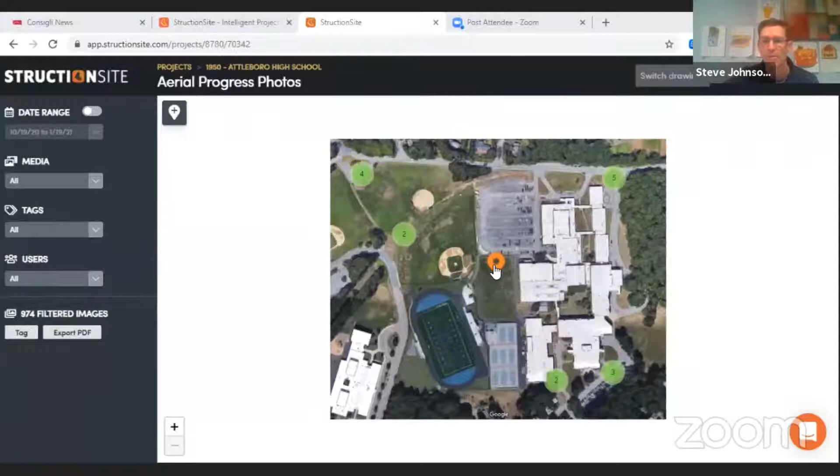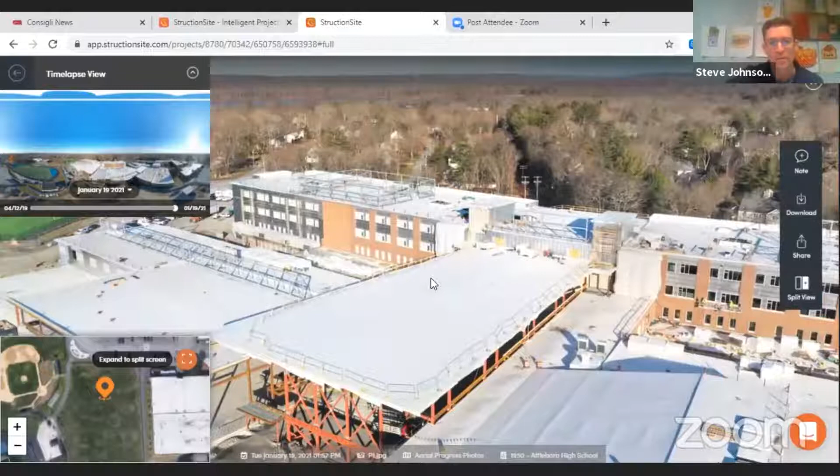We have some good progress in the field. We have almost all of the roof on. There are two sections of roof that we're buttoning up: this low roof on one side of the building, and its partner on the right-hand side. Other than that, all the main fields of the roof are on. In the next couple of weeks, we're going to have these two sections done, which is a big milestone for the amount of roofing installed.

The roofer will need to stay on site. There's a lot of metal trim and other work that needs to be done around the edges, but the field being done and this far along helps us get that much more weather tight on the interior of the building.

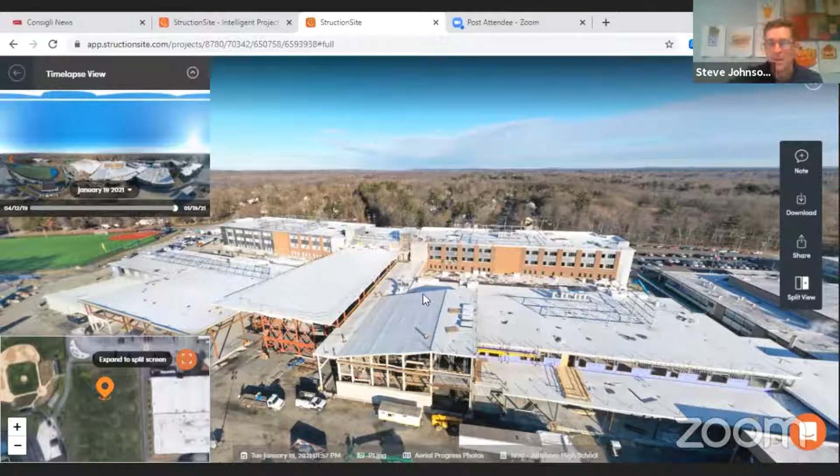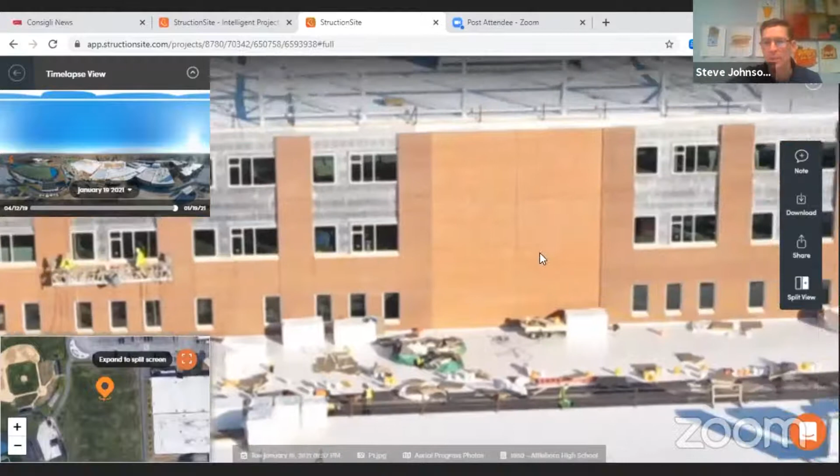You'll also notice we've got, if we zoom in here, some storefront windows in on this side where a lot of the brick is also completed. All along here we've got storefront windows, and then the masonry continues.

We're on this section, we're getting... hold on, there's some feedback, somebody's got to mute. Jim, can you mute people? Sounds like a TV that's on.

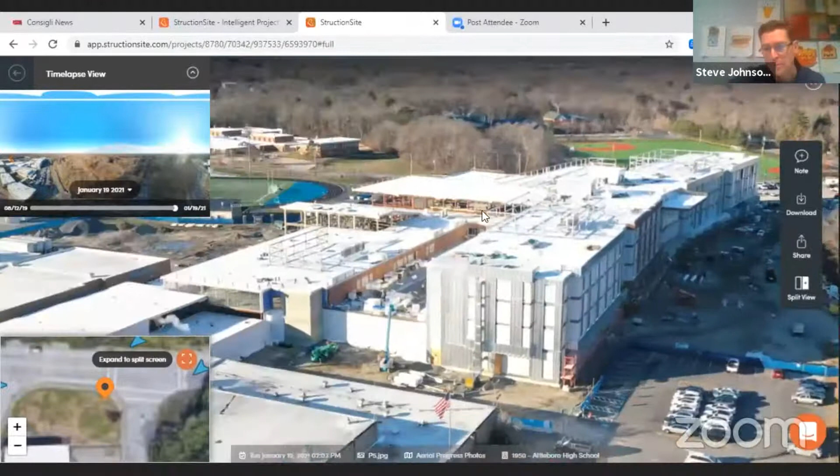So the mason continues to work over on this side. I'll switch the view — it might be more helpful if we see it from here, get around a little bit so you can see that more of the masonry, more of the bricks, has been installed on this elevation here, kind of hidden from view.

We've got masonry starting on the front elevation of the building. That's scaffolding that the mason is using, so this face will start to take shape over the next couple of months.

Other than that, on the outside it's kind of business as usual where there's not a permanent window — there's a temporary window allowing us to temporarily heat the building. This is our temporary heat on the east side of the building here.

And we have poured almost all of the interior slabs on grade, which again is another pretty big milestone for us. The last section I'll pull up here.

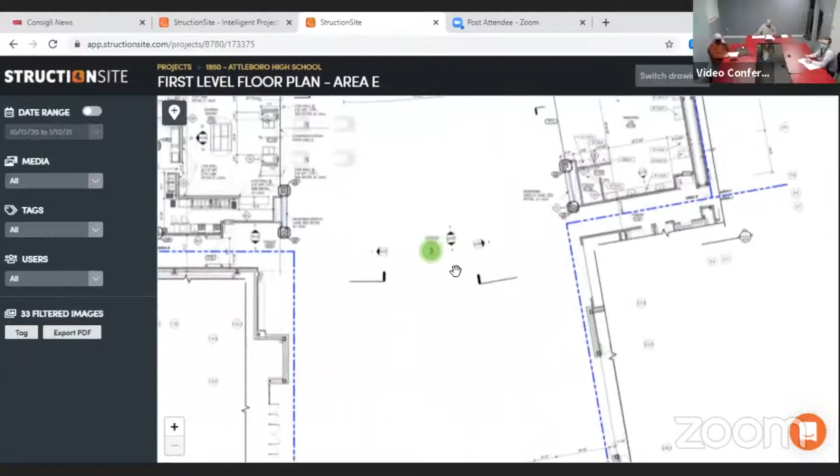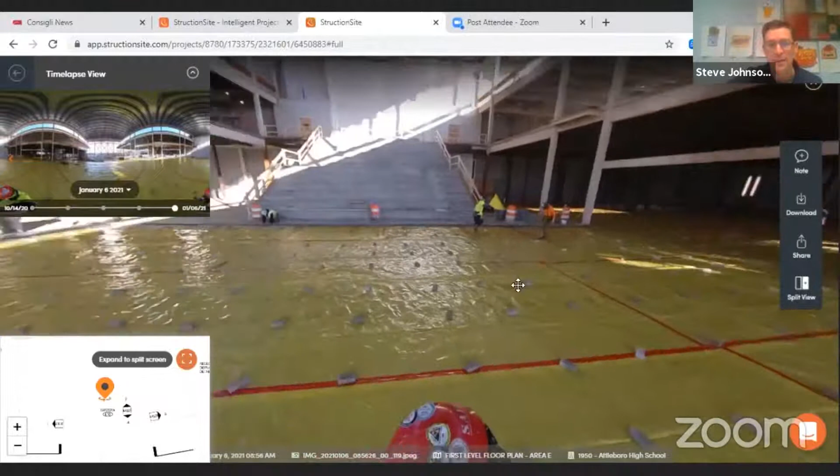So what you see in this picture, once it pops up, everything that's yellow here that has this barrier down will be poured this week. This was the last section of slab on grade concrete that we were going to pour at this part of the project. We've left some area open here just to allow access into the auditorium.

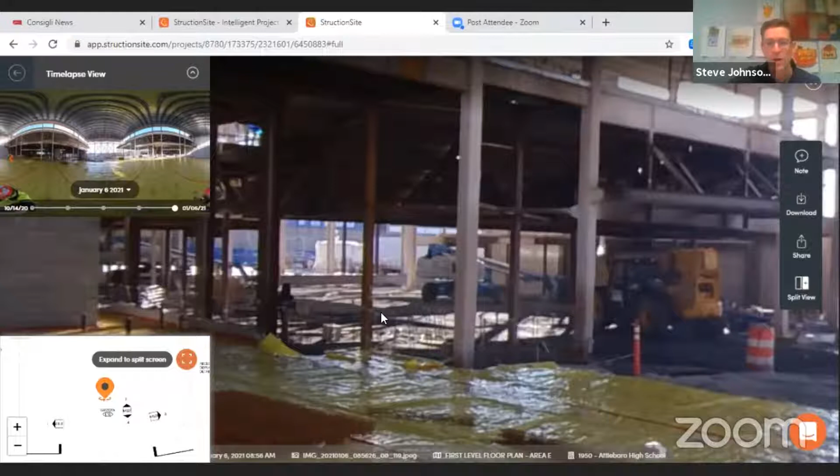The auditorium is the other slab on grade that we did not pour, and that was intentional. Eventually, the permanent feature in the auditorium is a sloped section of concrete, and we're keeping it level right now because it's allowing us to do all kinds of other work in here.

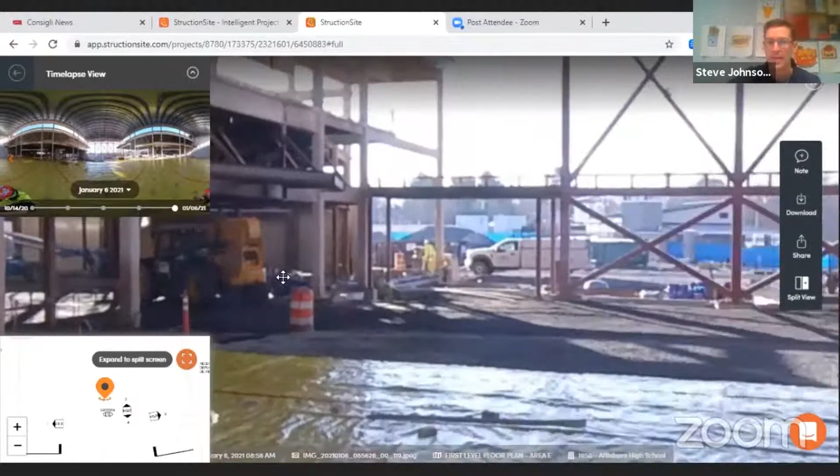That'll be one of the last things we do: dig that out, slope it, and pour that concrete. Leaving this concrete section out here allows us easy access with vehicles, so we don't trash and ruin a good concrete slab. So it'll allow us to get to the gym on that side and then over here into the auditorium.

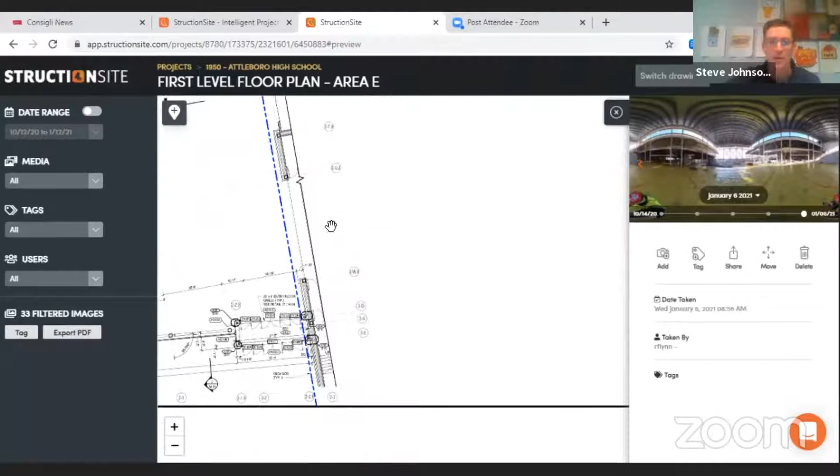Within the auditorium itself, the catwalks have been 100% installed, which is a good chunk of work to have done in place. Up on the 4th floor...

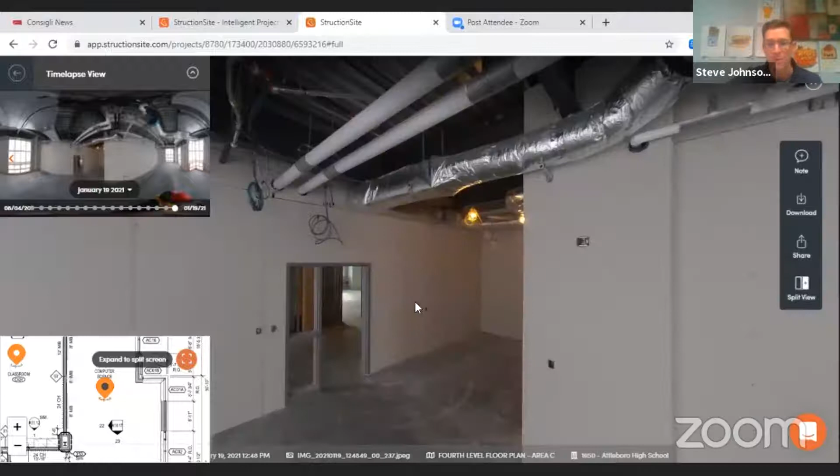Exciting to us construction nerds is that we have drywall actually installed in a room, in several rooms actually. So it's actually starting to take shape - no longer frames to walk through and walk around. A lot of drywall being done, which is great.

Our favorite noise to hear at a job site is screw guns, so a lot of that work is taking place now on the 4th floor. And then this is still more the 4th floor.

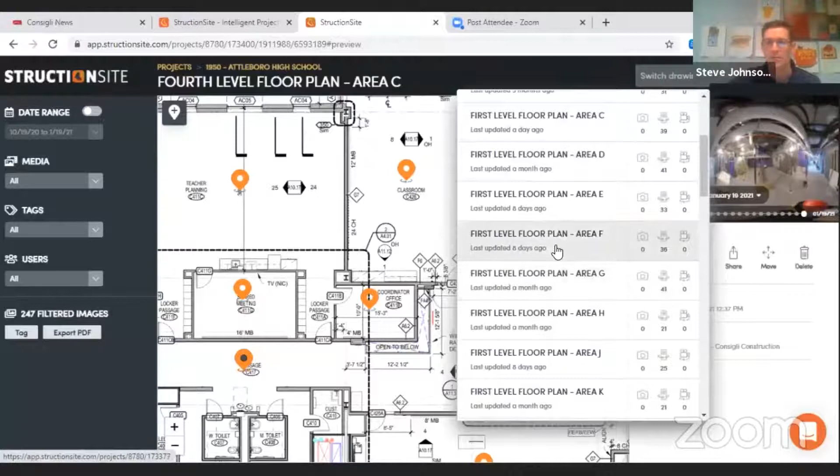So a lot of drywall in place, and then we've actually worked down to the 1st level and have a lot of framing done on the 1st level. And a lot of the MEPs have made their way all the way down to the 1st level as well, so good progress down there.

Show you that in a second. So good progress all around. Things are moving forward, lots of framing.

This is the 1st floor, C building here, already with a lot of the framing, a lot of the duct work above installed and already starting to be insulated. A lot of the plumbing and sprinkler pipe as well. So we're humming along - we are on schedule.

The next couple of months, you'll see a lot of masonry working its way around the building, followed by permanent windows, whether it's a storefront or curtain wall. That'll be the bulk of the activity.

Then within the building, we're just working our way from the 4th floor down. We'll also start to see some activity in the main mechanical rooms, which again is boring for everyone except for the mechanical people. But it actually is good progress, and it's a lot of work for us to get going on. It's just not the most exciting stuff to show in a picture, and it doesn't change much from day to day, but that's good progress for us.

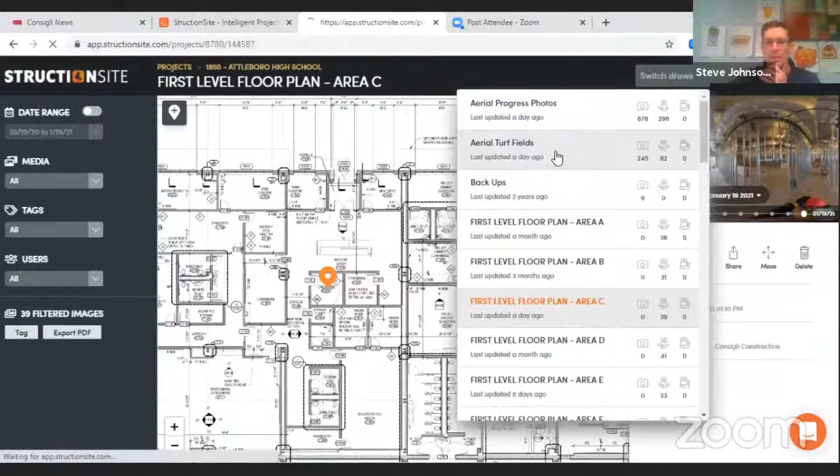Other than that, I believe last meeting, on the 6th, we voted on the substantial completion of the turf field, so not much has changed there. We are picking away at the punch list items, trying to reduce those down to zero, and we'll get KBA out there to inspect it once we reach that point.

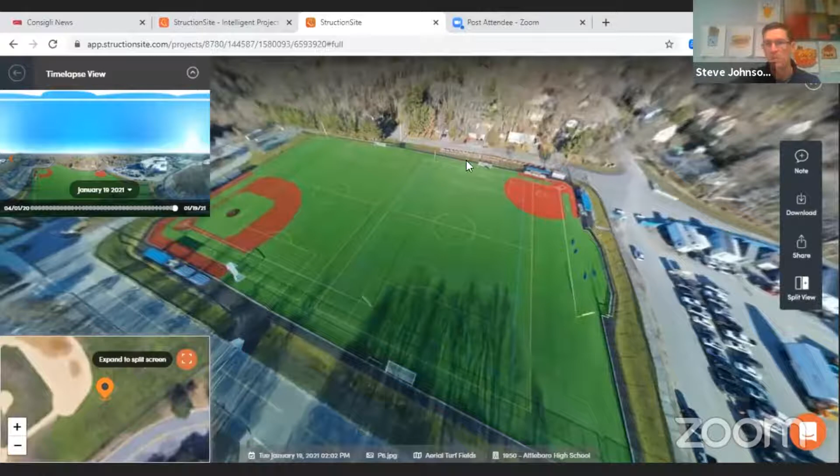But again, you won't see much activity here at all, you won't see a lot of change, except our temporary fence has been taken down. So what you see here is all permanent fence, and there are locks on all the gates, so it is secure and ready to go.

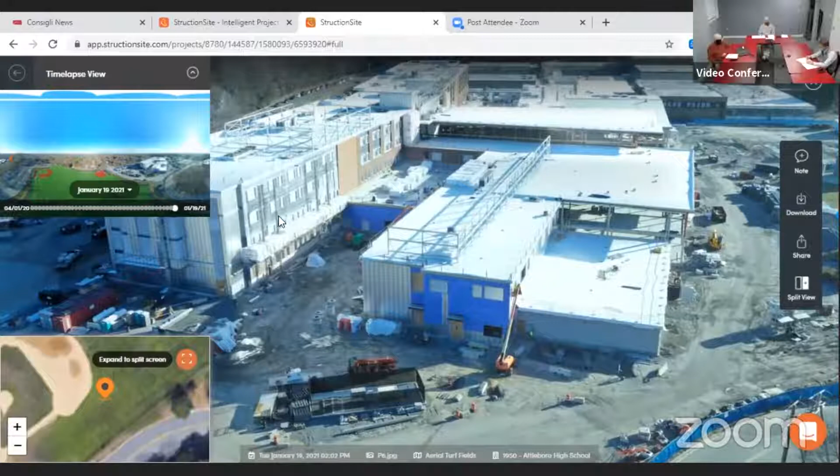So Steve, when will the building be fully enclosed? Like with permanent windows and glass, Jack? Well, how about with temporary and then permanent? So temporary, the ABC building is already there. These other buildings, it'll be some time, and quite honestly, we probably won't temporarily enclose some of these sections because the cost to temporarily enclose it doesn't make it feasible, doesn't make it worth it, since we're not going to be able to throw crews out there to put any additional work in place.

So it'll be a few months before permanent work is started back here in the south section and then have it fully enclosed. But we do have enough work in all areas of the building to keep us going very steady right through the winter.

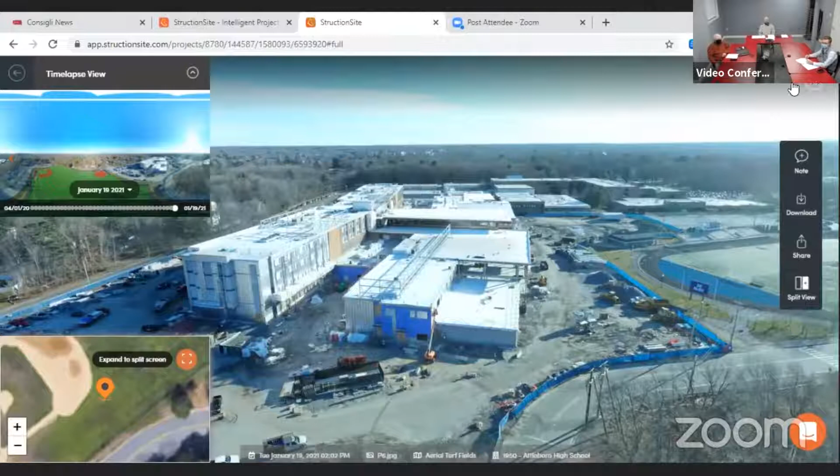I just want to update the committee that the plan to discontinue a portion of the street, the grassy areas that we've just planted, and then eventually give those to the homeowners has been prepared. Sammy Otis, the engineer, is preparing the application, which we would file with the municipal council, asking them to abandon that portion of the right-of-way that we no longer need and that we would like our neighbors to mow.

Those are my questions. Anybody on the committee have any questions of Steve? I guess you're all just sitting here in awe.

Steve, I think the next thing to do would be to move on to the change proposal logs, the transfers and change order number 4. Yeah, so seeking approval of change order 4, which includes 5 different change requests, GCRs.

The first GCR, 016, was for RFI 399, additional steel supports at folding glass partitions. This is due to the weight of the partitions, some additional steel was required. That's $32,205.16. GCR 019 was some shop drawing revisions for casework and some casework millwork revisions that resulted in a credit of $9,228.91.

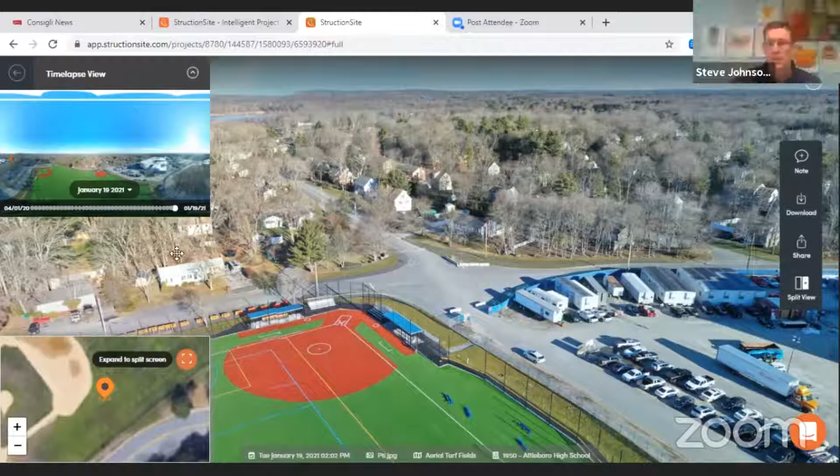Absolutely. I'm going to have to change my view. And while you're doing that, the change to ductile iron, was that a plumbing code requirement?

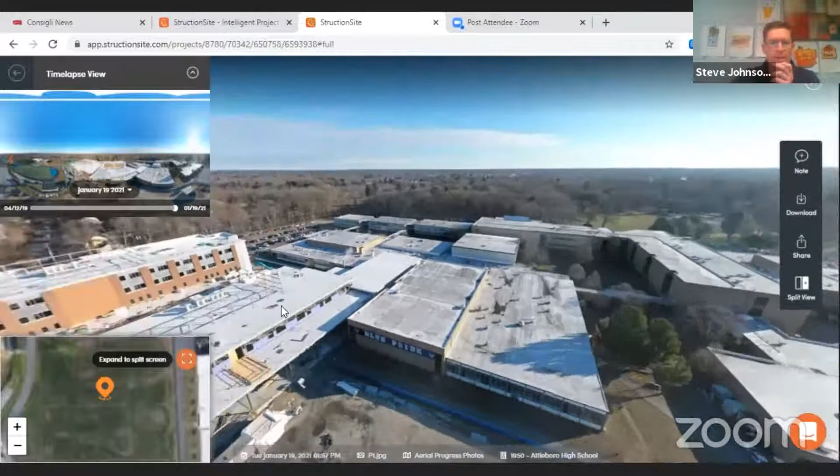That was not a code requirement. Joe, do you recall? Joe or Craig, do you guys recall? I could get my mute button off. I do not. I defer to Craig to discuss that.

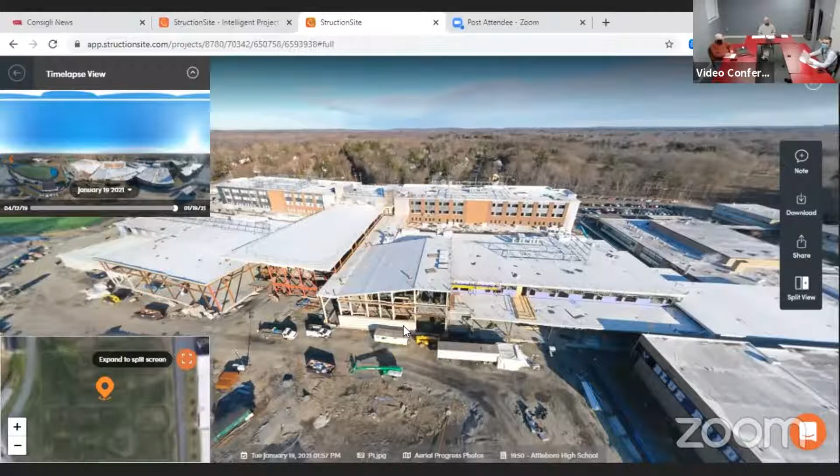Now we can see, Steve, if you put your cursor up, zoom in a little bit, the sloped roof there of the auditorium. We were concerned that snow would come down there and then pile up against the window frames for the cafeteria. So it seemed like a valid idea to put the snow guards in there to keep the snow from sliding down the slippery roof, correct?

Yes, it's actually a snow fence, a continuous bar. And then Craig, can you address the ductile iron issue or not? I am currently doing some research and development to remind myself, and I can report back in a little bit. Okay, we can certainly ask you for that.

I guess, does anybody have any other questions about those 5 change orders? Then Steve, do you want to talk about item 3A, B, C, and D? Sure, yep. While we're waiting for Craig?

Yes, so these are contingency transfers. Again, these do not increase the GMP at all, it's just a transfer of money. There are 4 that we're seeking approval of.

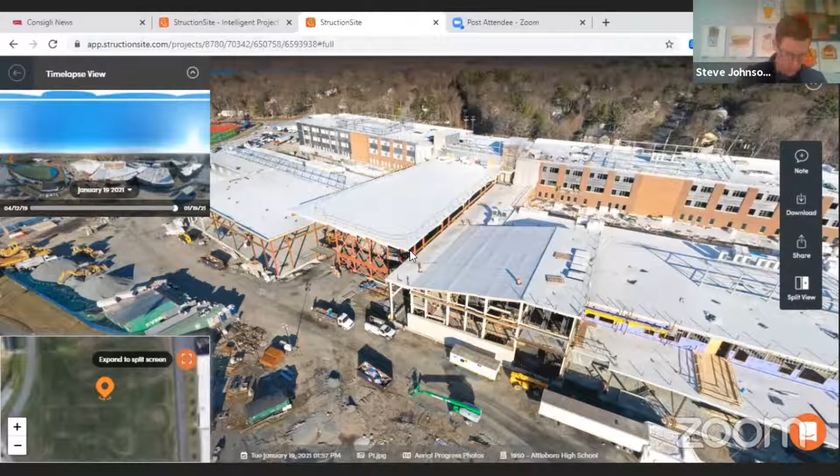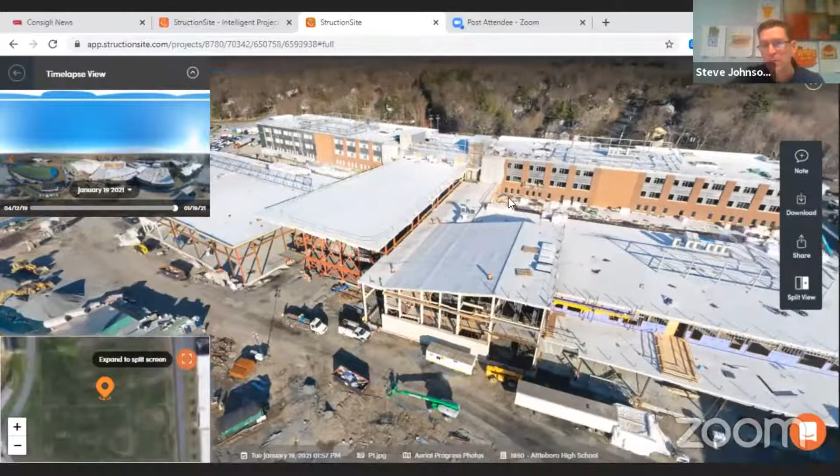GCT 009 was to cut and patch the decking for the hydromobile access. So in these 2 sections here where the mason worked, the type of scaffolding that they used went through the metal decking down to solid ground. And then once they removed the scaffolding, it had to be patched back into place and welded back into place. So that work was completed by our structural steel sub. That is $1,572.23, done on time and materials, tracked by Consigli and Skanska.

GCT 10, VFD installation and mounting. This was a scope gap, quite honestly. When the work was bought out, nobody owned actually physically mounting the VFDs onto the wall, so we had to buy that out with the electrician. It made sense for them because they were going to be wiring it anyways. So that is $22,565.53.

Steve, for those of us who don't exactly remember, what is a variable frequency drive, and what is it driving? It's, you had to ask that question, huh, Jack? Is this a Craig question or a Joe question? Yeah, I'll be honest, I forget what they are connecting to in this particular case. But they're some sort of motors, correct?

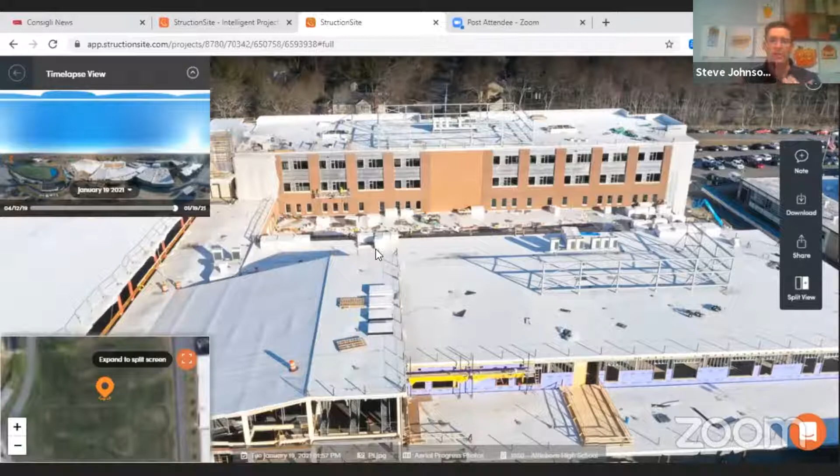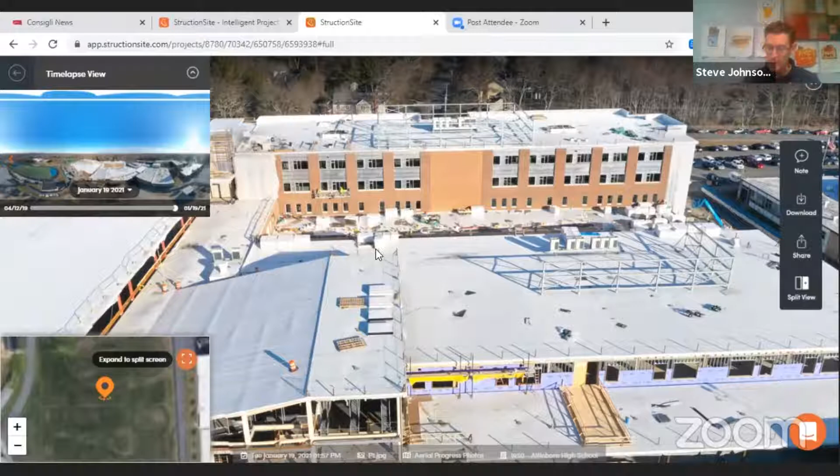GCR 13 is to seal spray fireproofing in the elevator machine rooms. Depending on your elevator inspector and the mood he's in, sometimes when they walk into the elevator machine room they don't like to see spray fireproofing, because they feel it dries and flakes off and could get into the equipment. So the options are to put a sealer on it or to enclose it with drywall and framing. Drywall and framing is expensive, so we thought just sealing it, not taking the chance the inspector wouldn't like it. That's $1,907 to do that, for 3 elevator machine rooms that'll get sealed.

And these are all coming out of our contingency on the project, correct? Correct, so it's just a transfer of money.

Craig, have you figured out the previous question? I have. Originally the piping was reinforced concrete piping. When they were doing the catch basin, the invert did not work, so to accommodate the invert they changed to ductile iron, which allows a different slope. That was the result of the change, to change the material to be able to change the slope of the pipe. Okay, thank you.

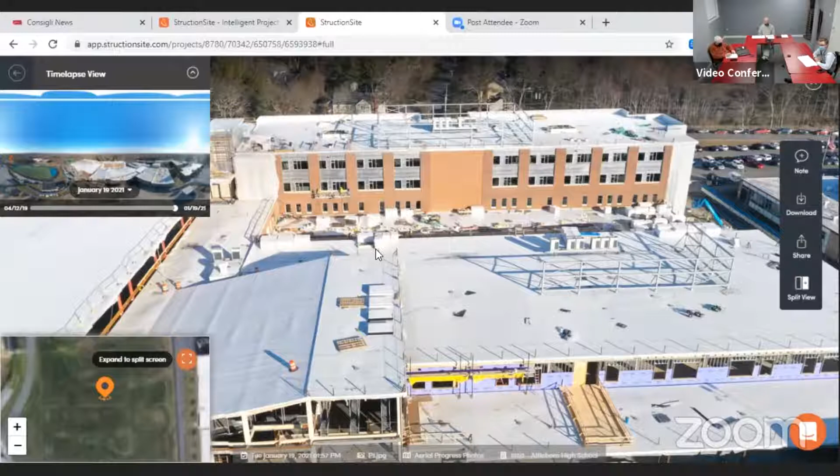So therefore, unless anybody has any questions, we could take a roll call vote. I'd like to save time and suggest that all of the items in change order 4 and all of the contingency transfers be taken as one vote, unless anyone has an objection. Hearing none, Jackie, a motion's in order?

So moved, and Terry, second. Roll call: Jeremy, Dave yes, Jason yes, Jackie yes, Jerry yes, Kelly yes, Bill yes, Terry yes, Ed yes, Mark yes, Rob yes, Andrew yes, Jack yes, Paul yes. Motion passes unanimously.

Steve, is there anything else you want to update us on? Yes, we actually have some additional change requests being vetted out that are on the log. Some new ones from last month. Please tell us about those.

We start at GCR number 28. GCR 28 is H11 stair revisions per submittal review. After going through the shop drawing phase, it was determined that some additional supports were required for the stair. This is the stair in the gymnasium that leads up to the weight room and other areas at the end of the gym. So it's either one column or two columns - I think we're landing on one additional column that's going to be required there. That's being vetted out, not at a final number yet.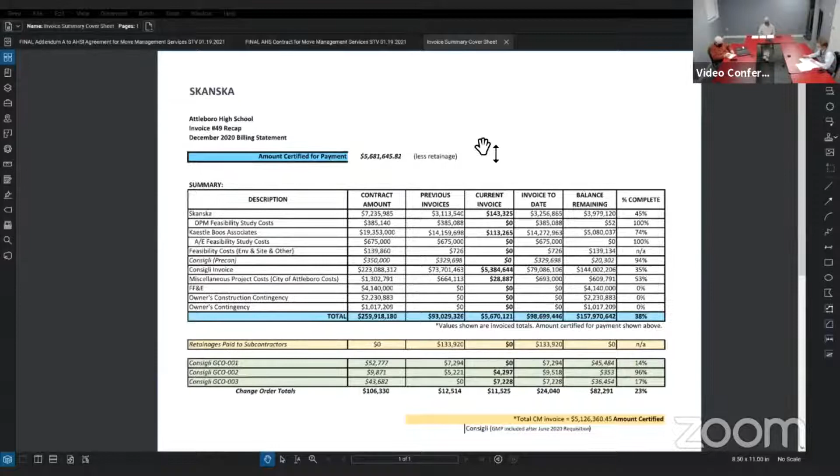They would. Okay, so now we can see you've shared your screen, Anjanette, so please give us the monthly recap. Okay, so with the invoices received for the month of December, the total is $5,670,121, and then with an additional $11,525 being billed out for some of the change orders. The total values to date, invoiced to date for the project, are $98,699,446 plus the $24,040 for the change orders that are below the line, and then that gives us a remaining balance of $157,970,642, and it brings us right around 38% complete for the entire project.

And then next month, what I'll do is add to the bottom of the change order here the next one that we've just approved, change order number 4, so those values will start calculating down at the bottom as well. Okay, anybody have any questions on the budget recap? Hearing none.

Anjanette, do you want to talk to us about the move management services contract? Sure, actually I have a copy right here, conveniently. So last month we presented our recommendation for Move Management Services to award the contract to STV DPM. So what they've done is sent over their agreement with an addendum that identifies all of the terms of the contract. I had them break all the values out by year and value so that when they bill us, we can bill directly against those numbers.